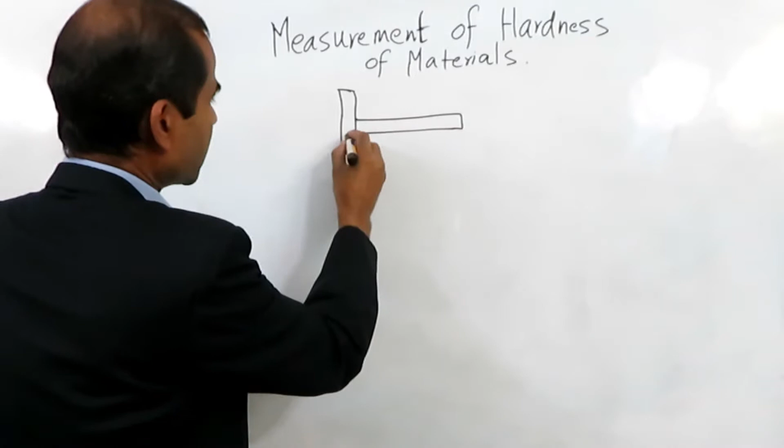So in this video I will show you a very innovative and practical method of measuring hardness using a very simple device which we have manufactured. In this method we have a stage here, and this stage is attached to a pillar here, and basically we have got a lead screw here, and this is connected to a motor. The motor will rotate the lead screw, and because of this rotation this stage can move up or down. So this is the lead screw,

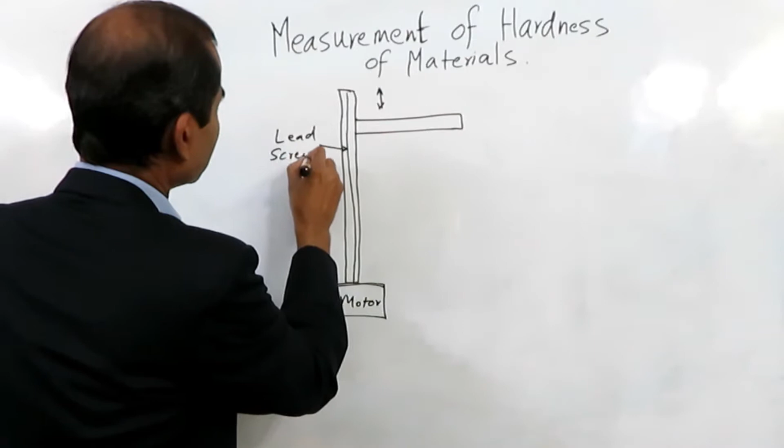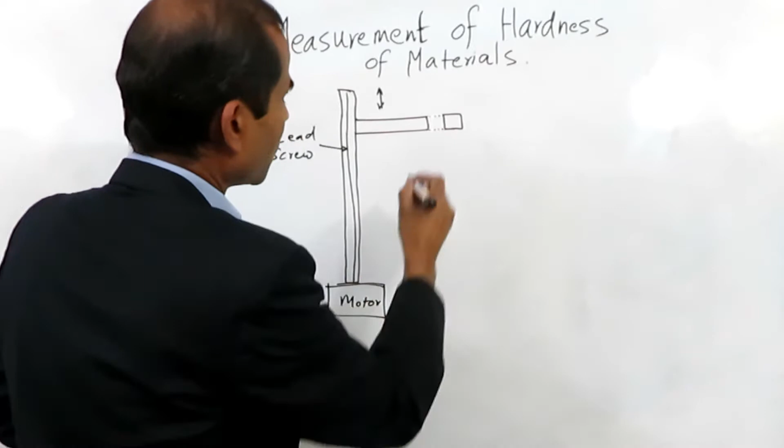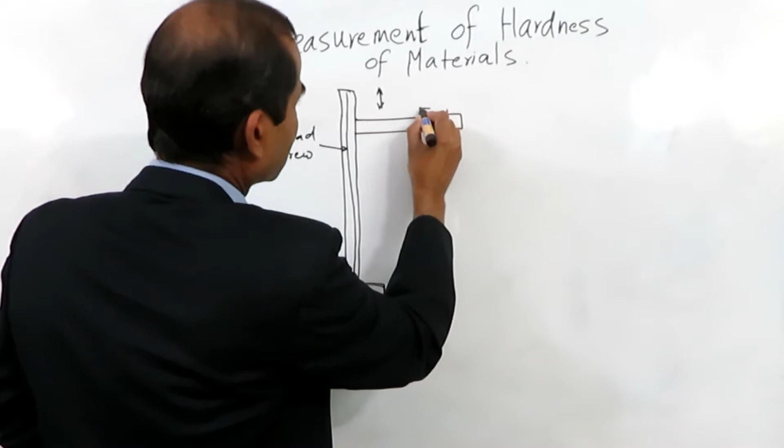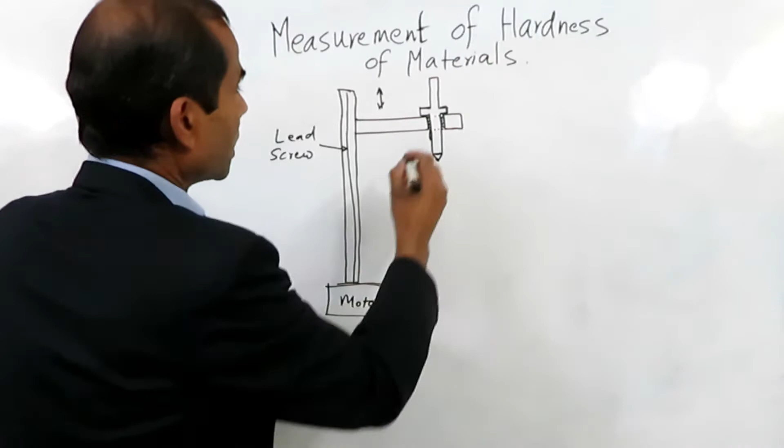and in this stage we have a hole here. And we have got a ball bearing on this hole here, and through this hole we insert a holder. This holder has a design of this kind, and at the end of this holder we have got a tip which is a diamond tip. This holder can accommodate some weights here. So for example we can attach some weights here.

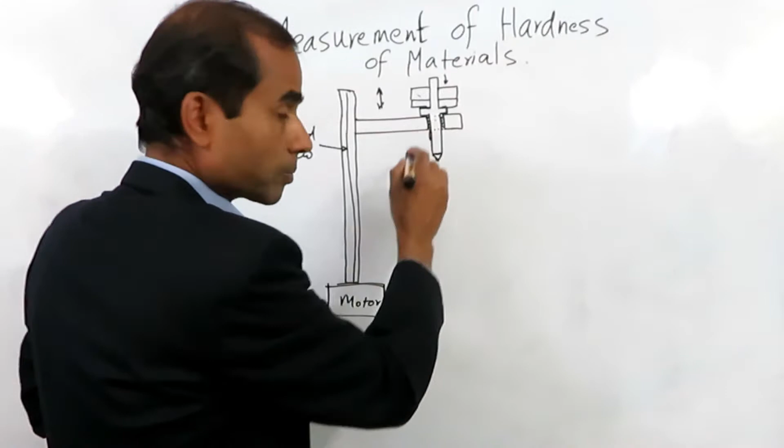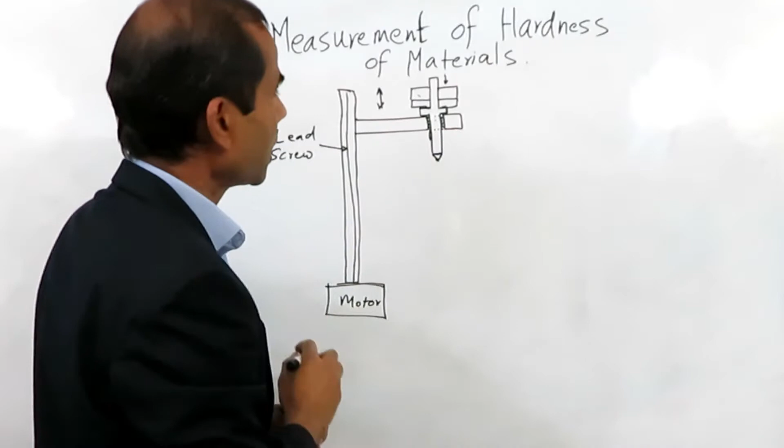So this weight can be attached to this holder, and between this holder and the stage there is a free motion because of the ball bearing. If it is hanging like this, in this position the holder will be touching the stage, but if we push from this side, if there is a force from this side, this holder can go up, and therefore there will be no contact between the stage and the holder.

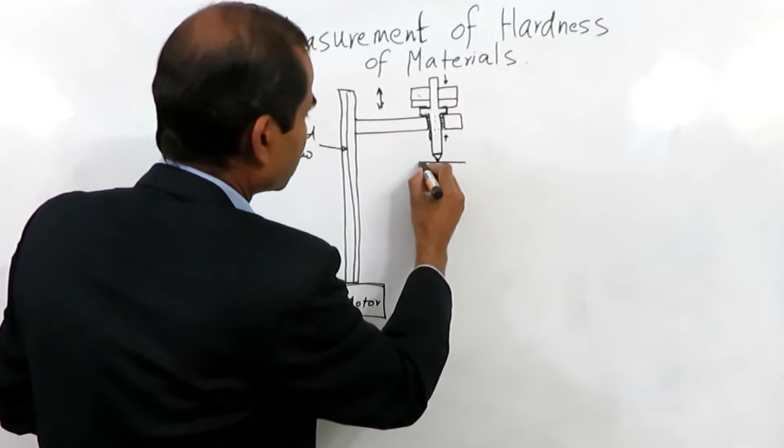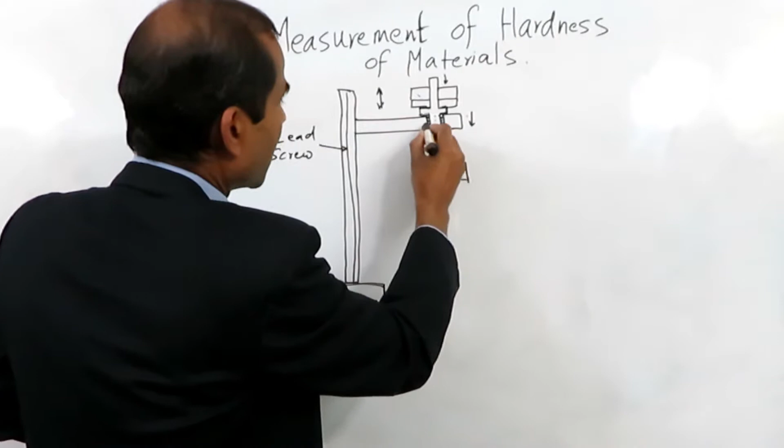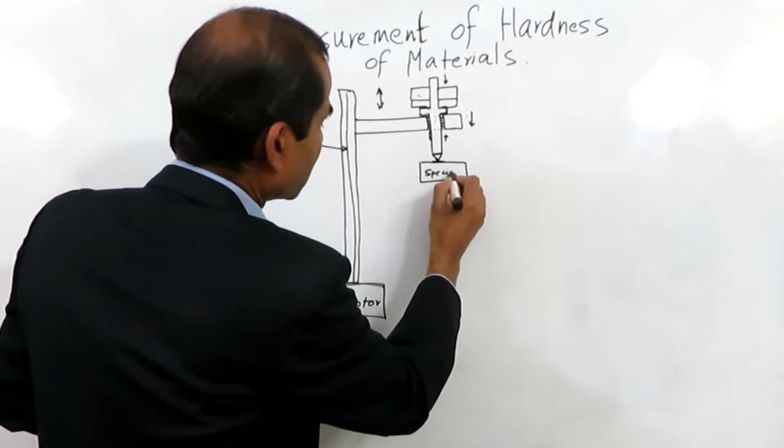So that means when we are lowering it down, and if there is a specimen here, this is the specimen of which we want to find out the hardness, and if we lower this stage down, at some point once the tip touches the specimen, the load will be taken by the specimen. As soon as the tip touches the specimen, the load will be taken by the specimen. So let's say we have got the specimen here, and this stage will move down. So let's redraw this stage. For example, let's say the stage is at this position.

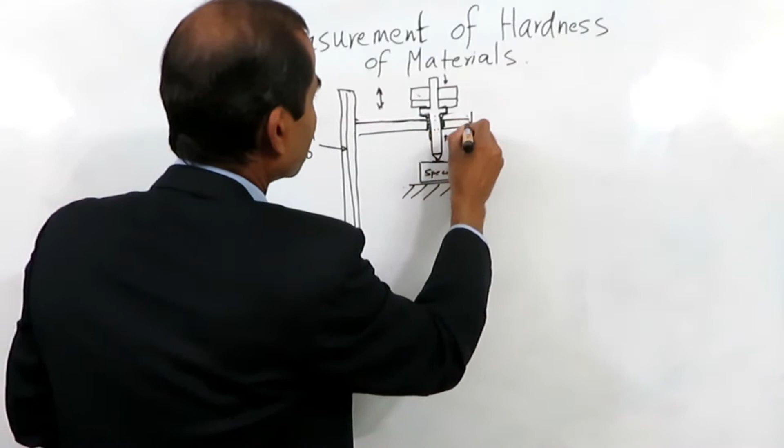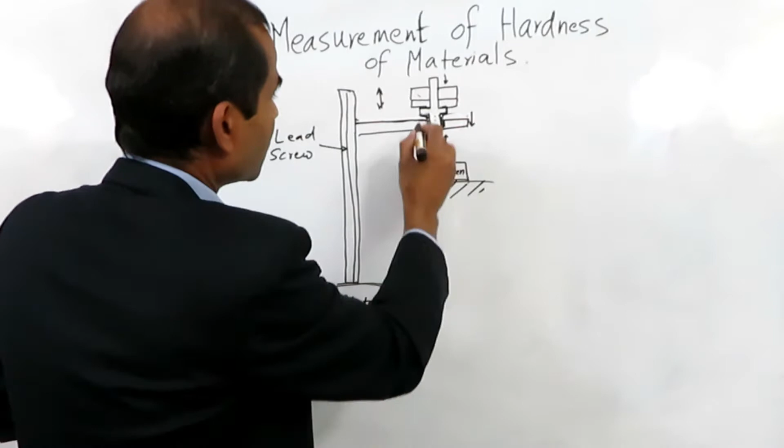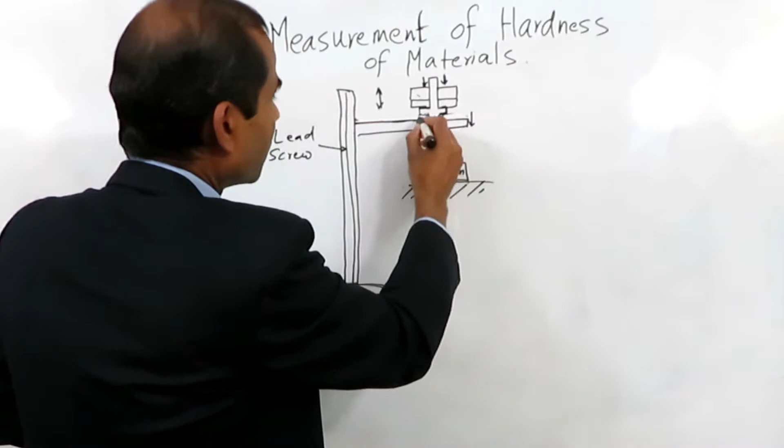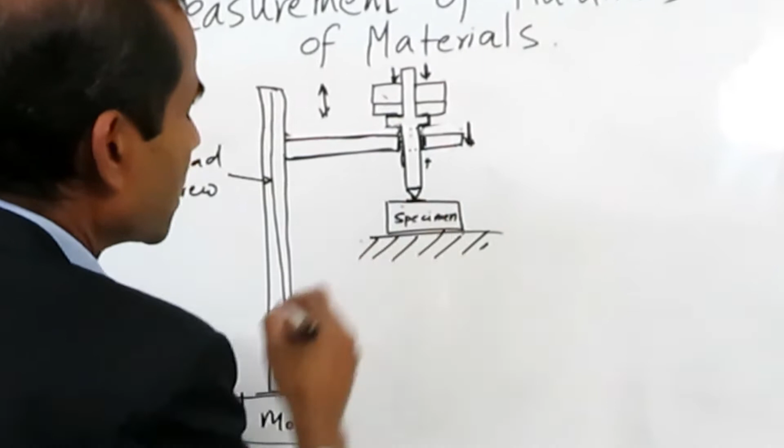So that means the stage is not taking this load because there is a ball bearing, so there is a free motion between the holder and the stage. In this position there is a gap here, and therefore the load that we are applying is being taken by the specimen entirely. So this holder is not playing any role in holding the weight. This is how we achieve this indentation on the specimen. First the stage was taking the load, and we are lowering the stage, and as soon as there is a contact between the tip and the specimen, the load will be taken entirely by the specimen, not the stage.

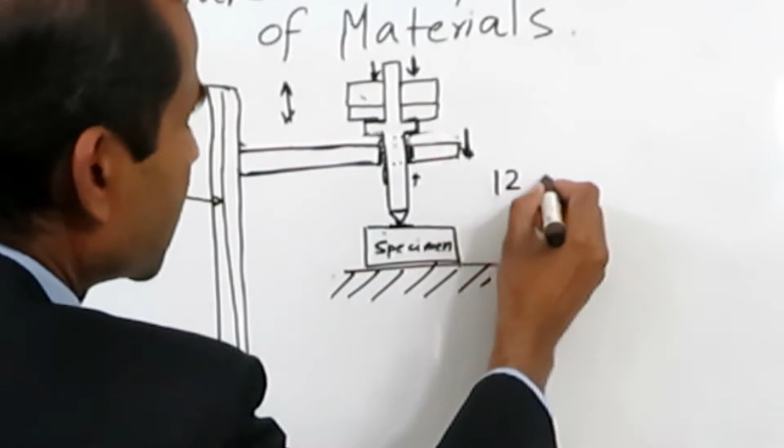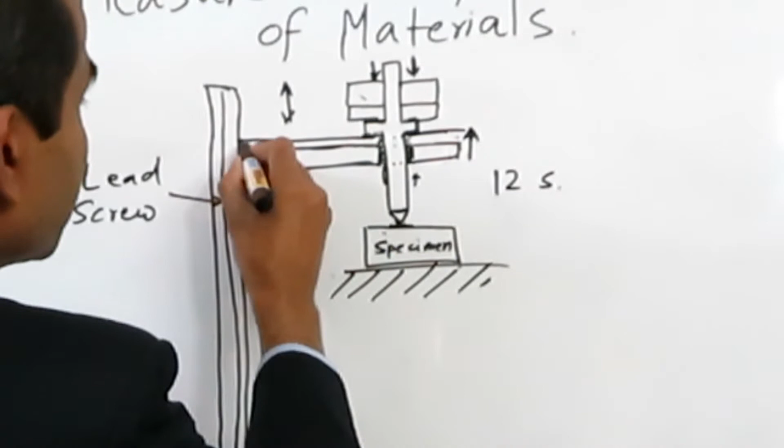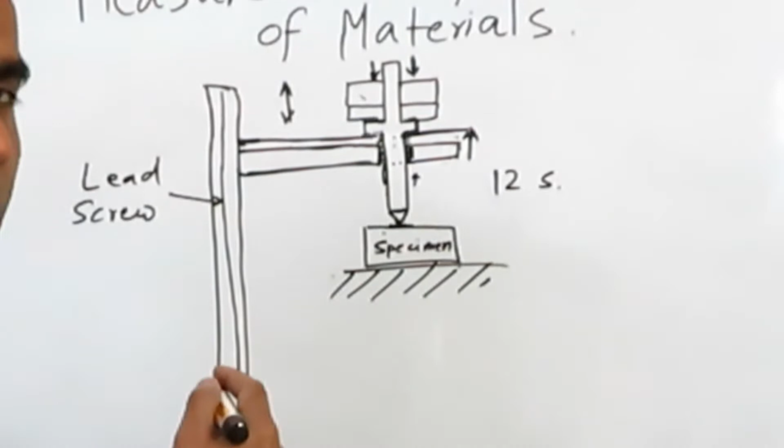And after 12 seconds of load application, we will move this stage back in the reverse direction, meaning up, and as soon as the stage comes to this level, it will pull the holder along with the weight up, and there will be no more load application on the specimen. So this is the simple device that we have designed and manufactured, and using this we can measure hardness of any material. So this specimen can be metal, polymer, or even ceramic.

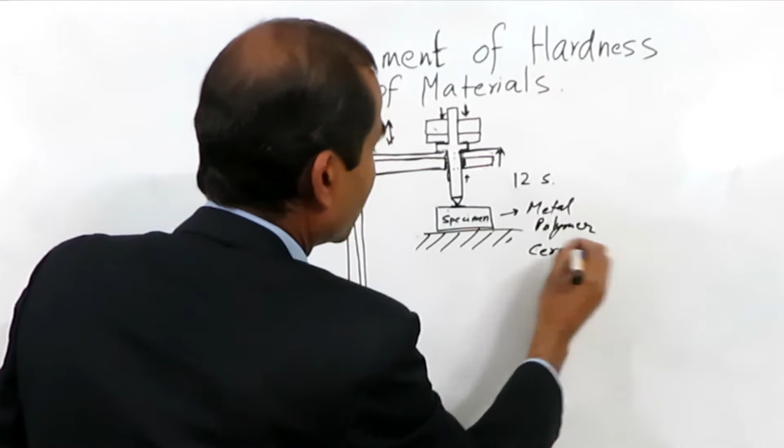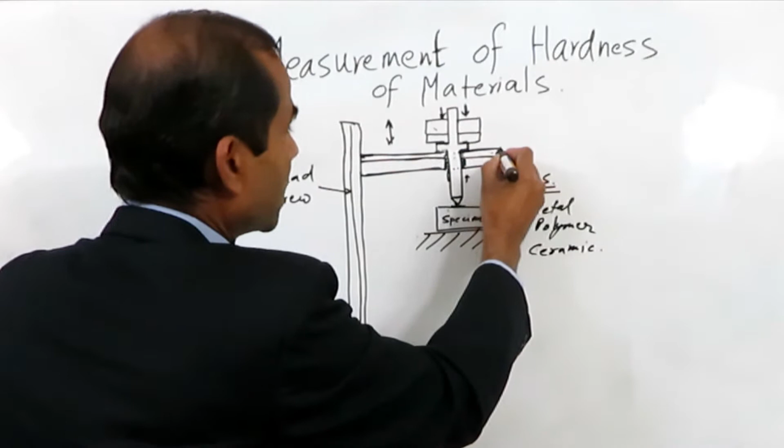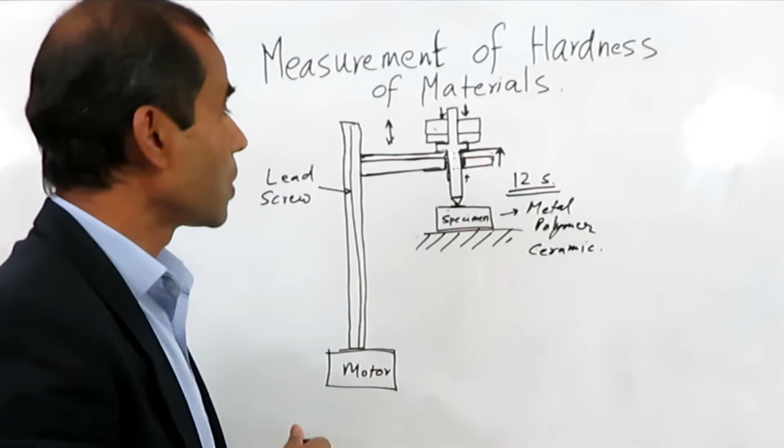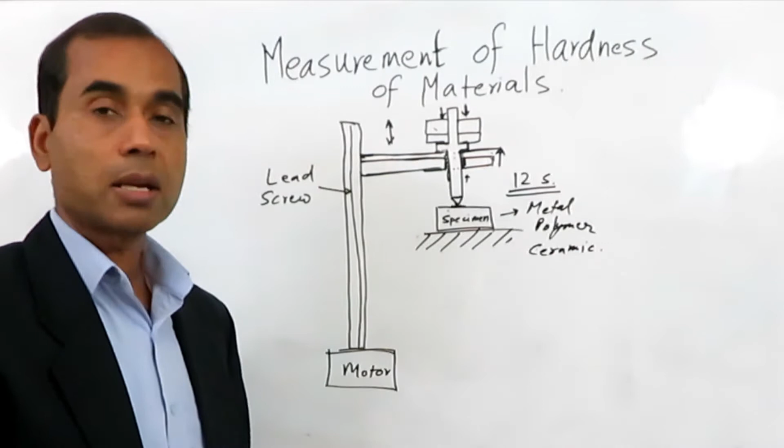So we can use any type of material and we can apply whatever load we want to apply, and we can select the dwell time, how long we want to apply the load, and we can actually control this. By controlling the movement of this stage, we can apply the load for any given time, and then we can take the whole setup up. So this is how we will conduct the hardness test, and I will show you in an actual machine how we have conducted the hardness test and measured hardness of materials.

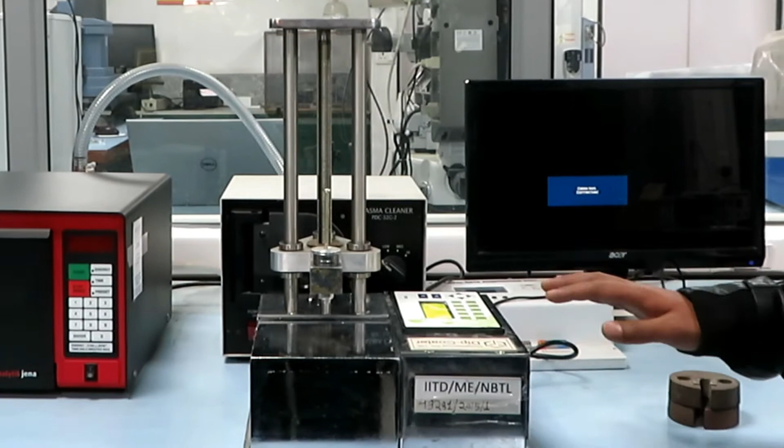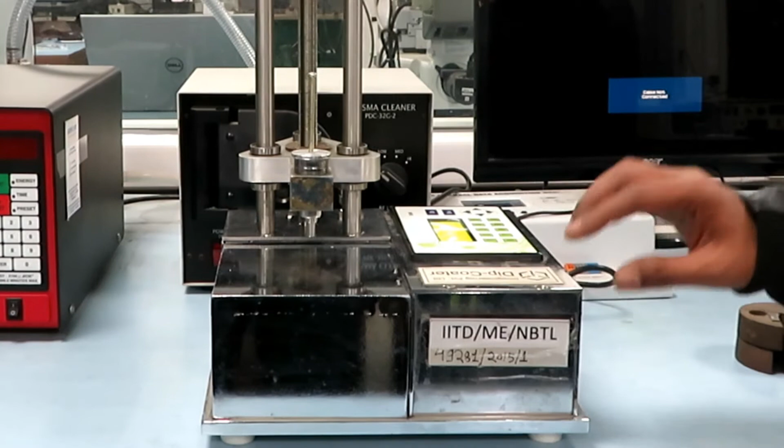This is the hardness tester, which is based on the principle of hardness as equal to the force divided by the projected area of the indentation produced on the material. This is the controller which controls the movement of the motor inside this part. The motor can move this triangular stage up and down using a lead screw. This is the indenter holder which also holds the weights used for applying force. The indenter tip holder can freely move inside the stage. Once the tip touches the sample kept at the bottom, entire weight force is applied on the specimen through the tip. As soon as the load is completely applied on the specimen through the tip, the stage movement is stopped.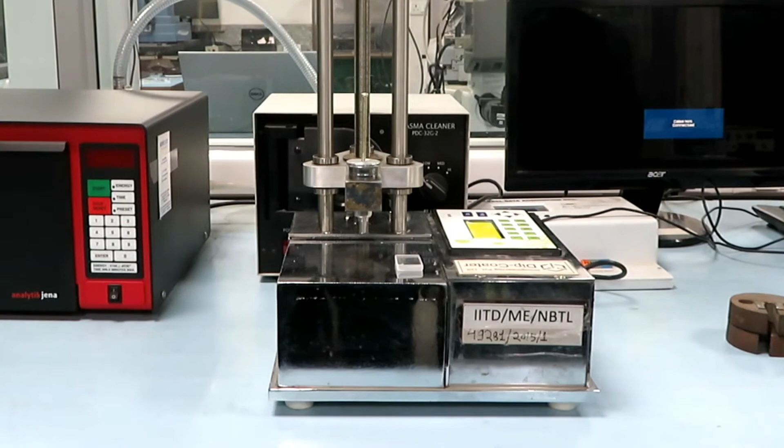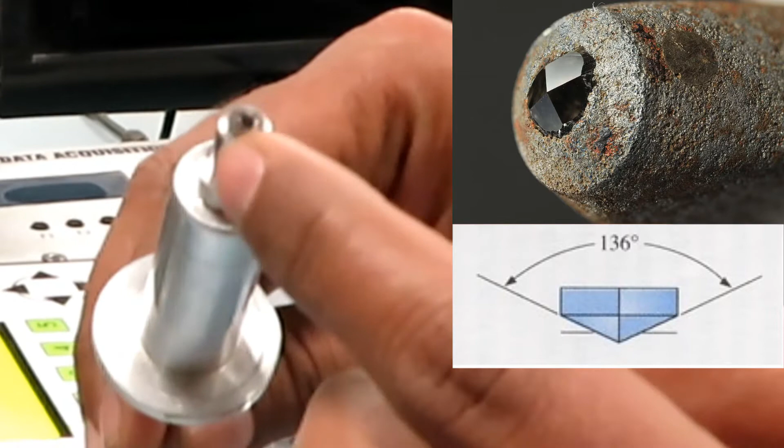The stage and the bearing inside keep the tip and weight holder straight so that the force is applied vertically downward. As you can see, one side of the holder has a square pyramid diamond indenter similar to a Vickers tip. The angle between the slant edges is 136 degrees. By keeping the holder vertical while the tip rests on the specimen, entire load is applied on the specimen through this tip.

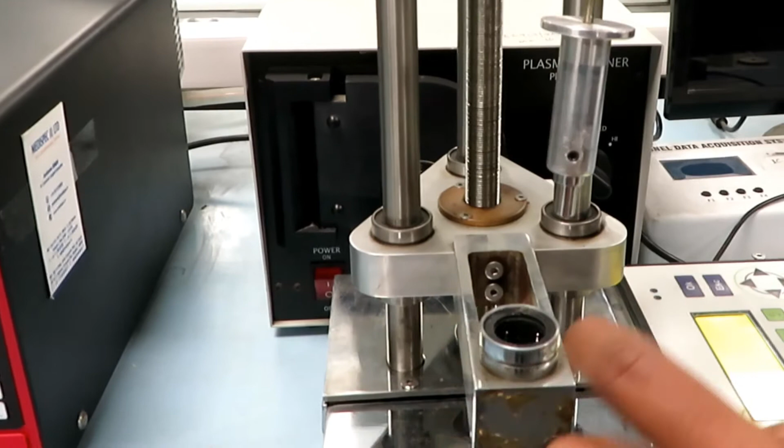The holder is inserted through this hole which has ball bearing inside. So when the holder is standing vertical on the specimen and the tip is in contact with the specimen, entire load is applied on the specimen. We keep 1 kg of load on the holder, so together with the weight of the holder, total load is 1044 gram, which translates into 10.24 Newton when the mass is multiplied by the gravitational acceleration.

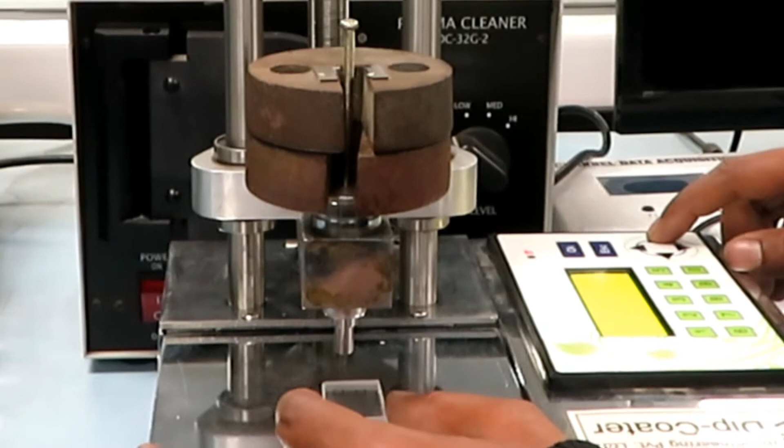With the load placed on the holder, we will lower the stage until the indenter tip is on the specimen kept at the base. As soon as the tip touches the specimen, entire weight is applied on the specimen because the stage freely moves down, leaving the holder standing vertical because of the ball bearing inside.

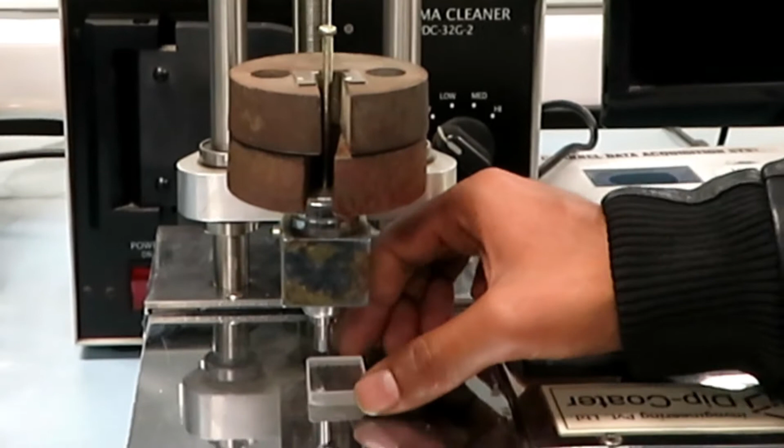The thickness of the specimen should be enough to avoid the substrate effect. In this case, we have kept the thickness of the acrylic as 6 mm. It is important to stop the stage movement as soon as the tip touches the specimen below. When the tip is on the specimen, the stage leaves the holder. Thus, the holder stands with full load on the specimen through the tip. All the load is applied to the specimen only through the square pyramidal diamond tip.

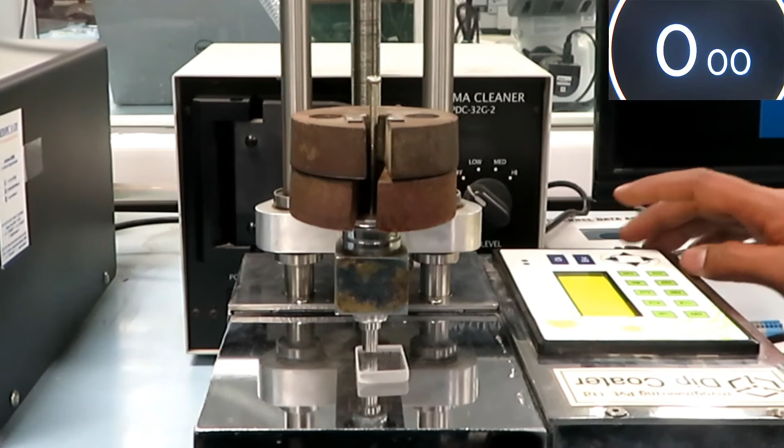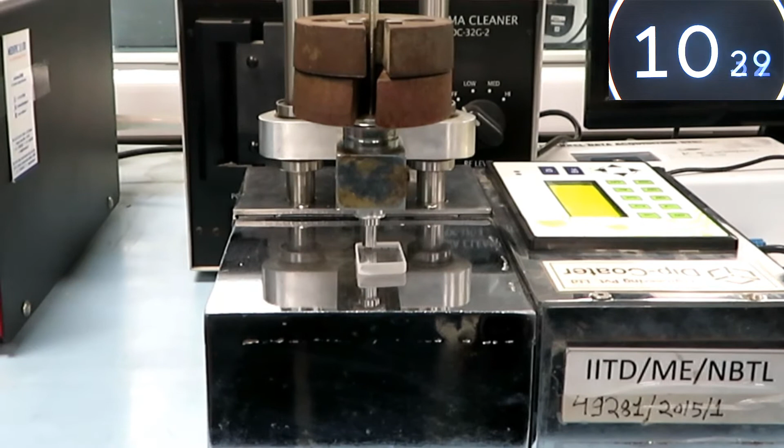Now the stage is being lowered through the motor control. As soon as the tip touches the specimen, total load is applied. We apply this load for 12 seconds and then move the tip holder up by moving the stage up. We follow the ASTM standard for dwell time, which says that the load should be applied for 10 to 15 seconds.

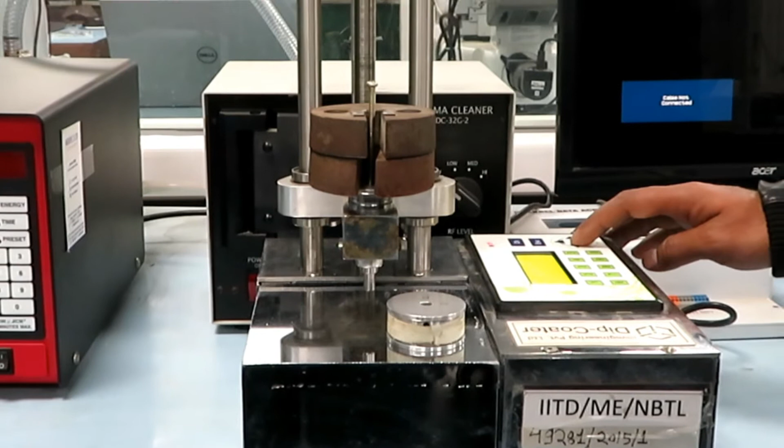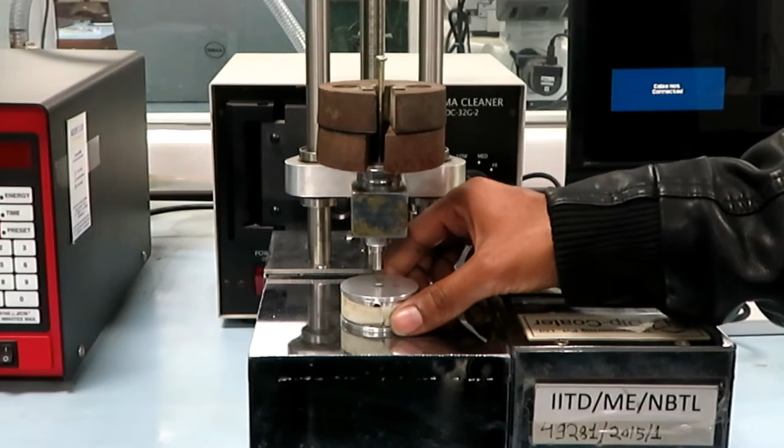Now we will conduct the same test on aluminum surface. So we will place the aluminum surface underneath the tip. You should keep the indentation away from the edge to avoid edge effect. Now again we will apply the load for 12 seconds.

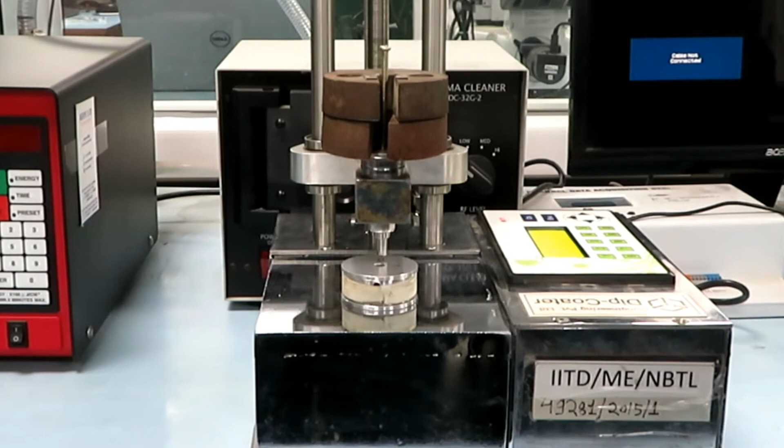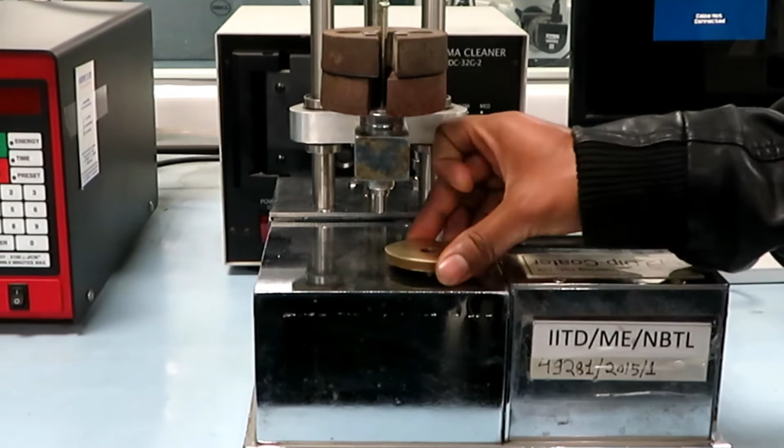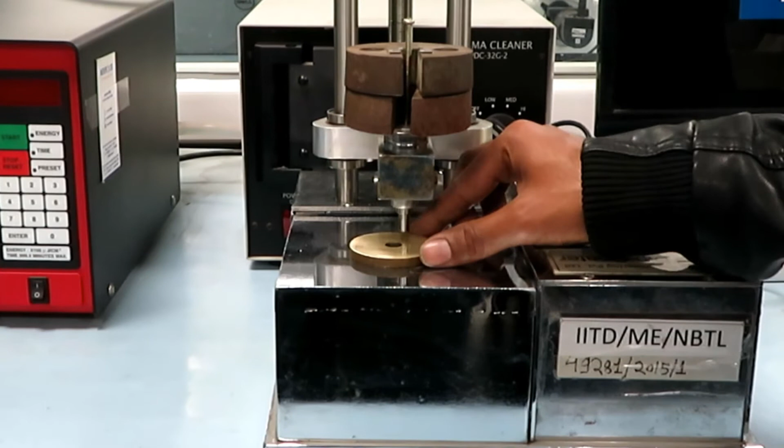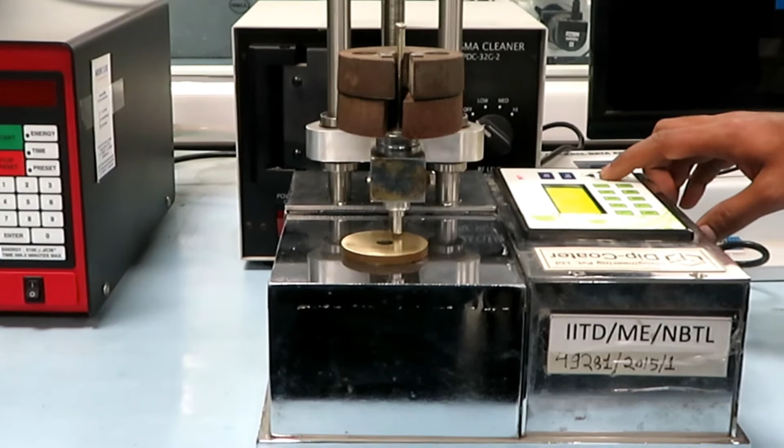Next, we will conduct the same test on brass. So as soon as the tip touches the material, we stop the motor, and after 12 seconds we will move the stage up by again switching on the motor in the reverse direction.

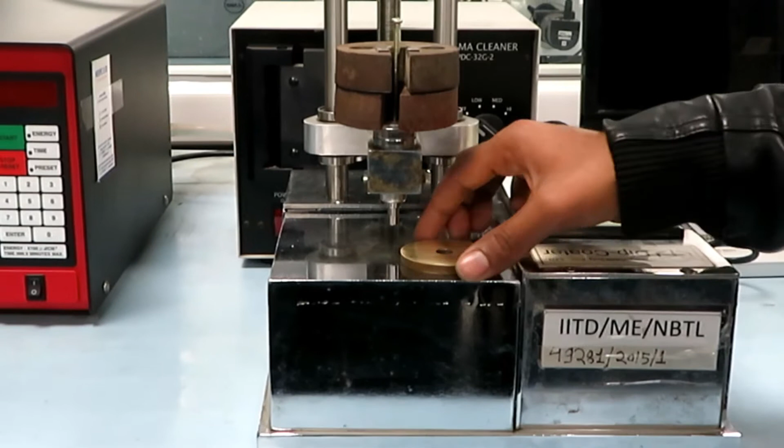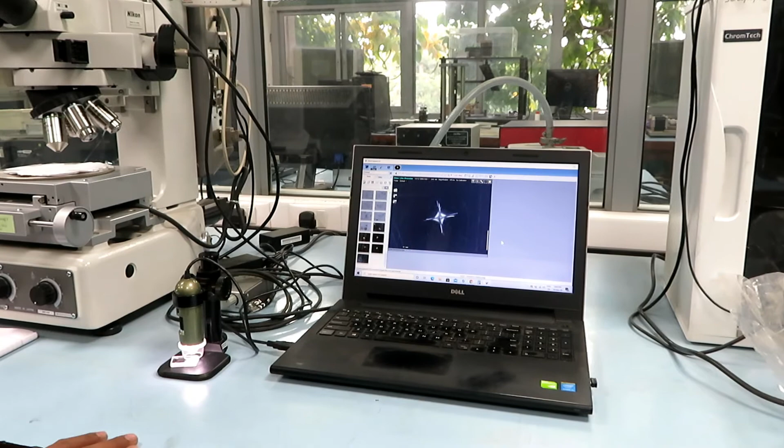So now we will image those indentation marks. It is very important to image the indentation marks with a correct method. In this case we are using a microscope. This is called Dino-Lite. It is a portable microscope and it has connected software. Using this software we can actually measure the two diagonals of the indentation mark.

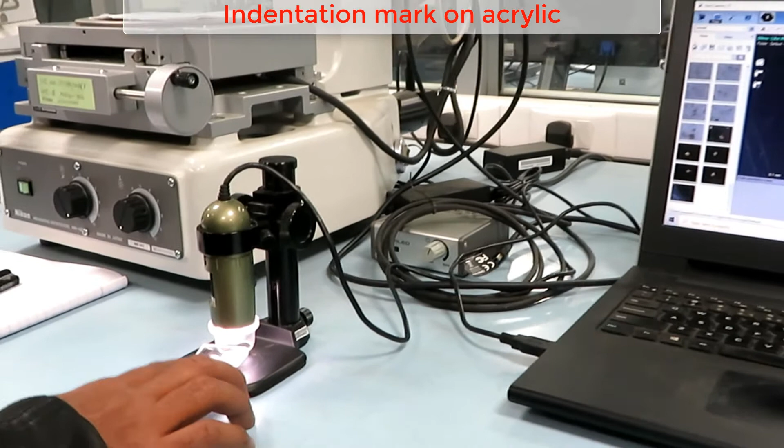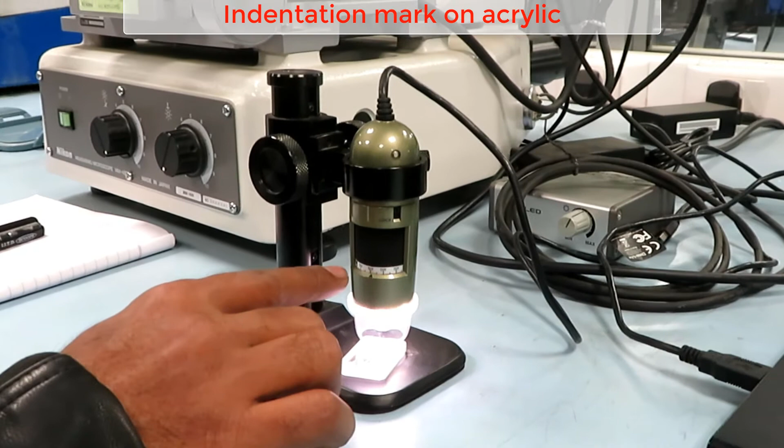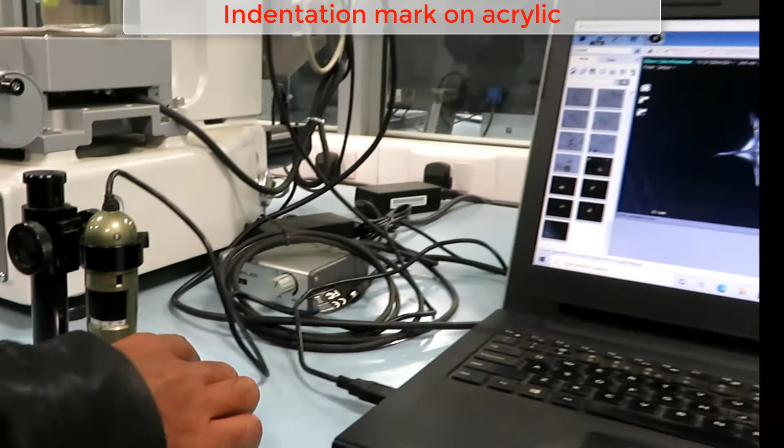Since we have used a square pyramid shaped indenter, the mark that we will get will be two diagonals at 90 degrees to each other, and the shape of the indentation mark will be square. So here is the magnification. This works in the range of 460 magnification. By fixing this magnification and properly calibrating the software, we can directly measure the dimension of these diagonals.

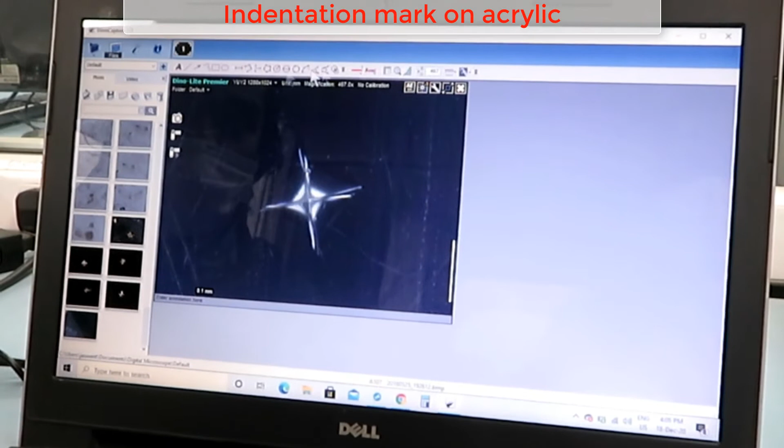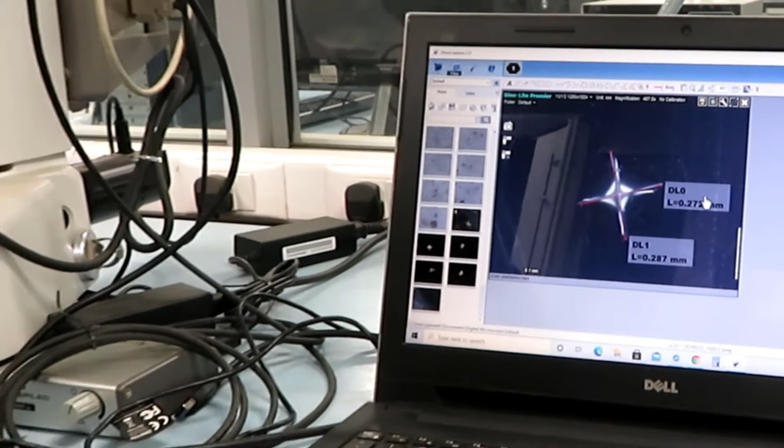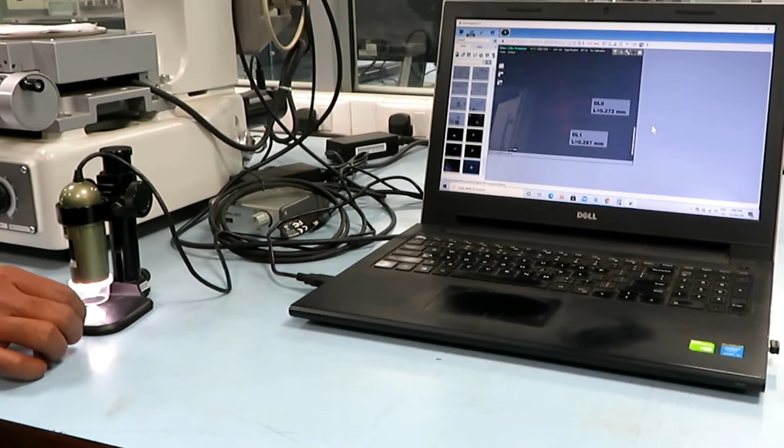So this is acrylic specimen, and here you can see one of the diagonal is 0.272 millimeter and the other is 0.287 millimeter. We will take an average of these two measurements and that will be our D. Using this software you can also image, so you can take the image for your later use. Now this is the aluminum surface.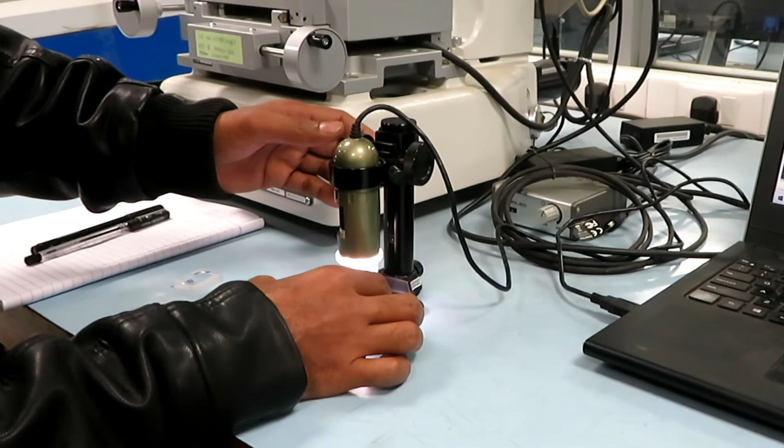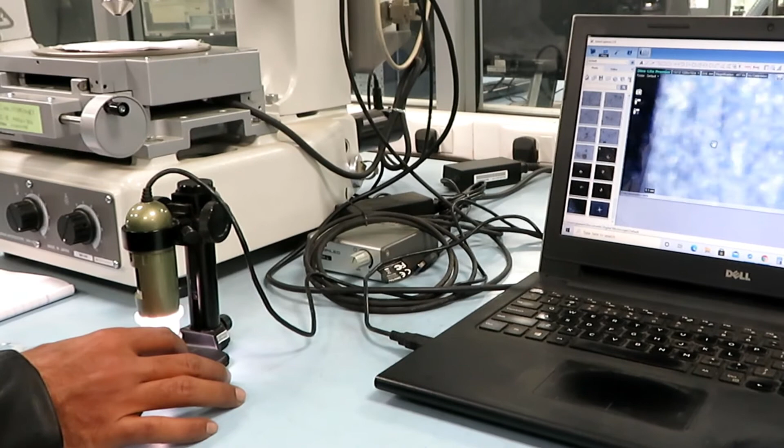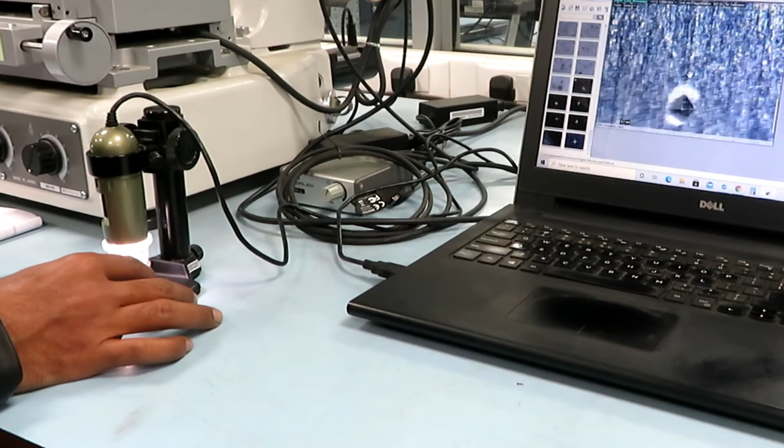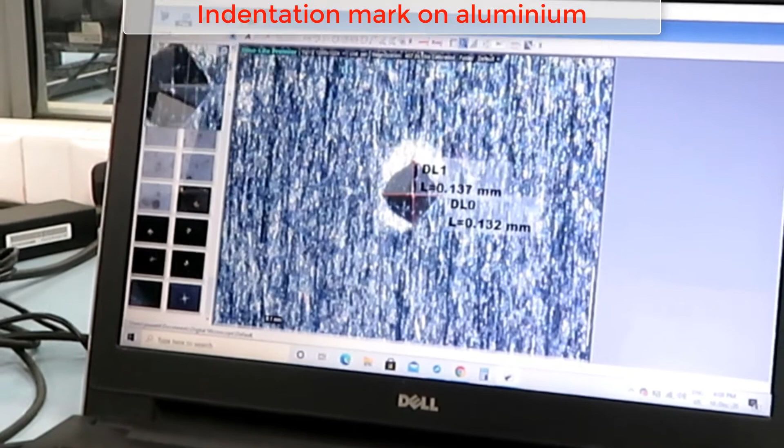If the indentation mark is very small, then you may need another type of microscope which has got higher magnification. So this is the indentation mark on aluminum surface. At the same magnification, we can see that the aluminum surface gives a smaller indentation mark compared to acrylic, which indicates that aluminum is harder than acrylic surface. Now using this software, we can measure the two diagonals. One of the diagonal is 0.132 millimeter and another one is 0.137 millimeter.

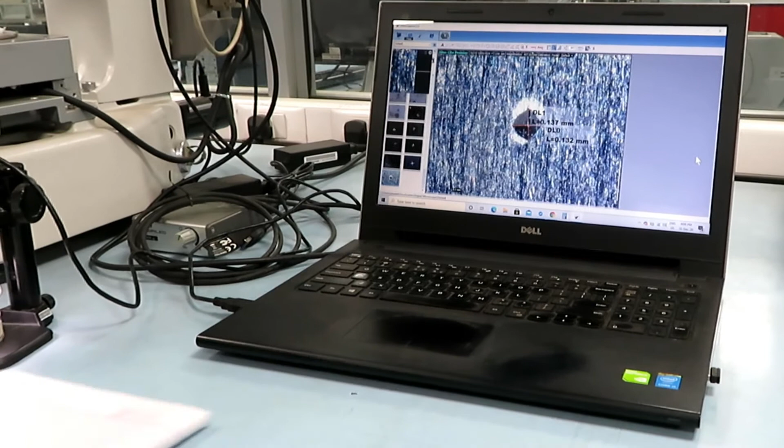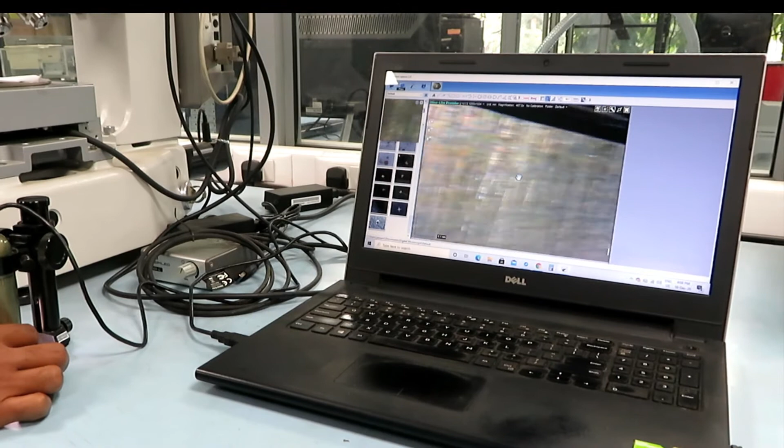Lastly, we will measure the indentation dimensions on brass specimen. Before hardness test, it is very important to polish the surface very carefully. Otherwise, the indentation mark may get lost in the scratches that surfaces have. So here we can see the indentation mark on brass surface. One of the diagonal is 0.14 millimeter and another is 0.133 millimeter. We will take average of these measurements and we will call it D for our hardness calculation.

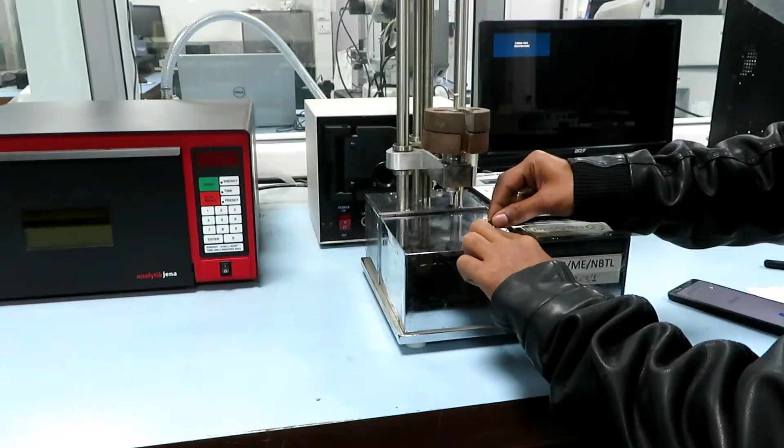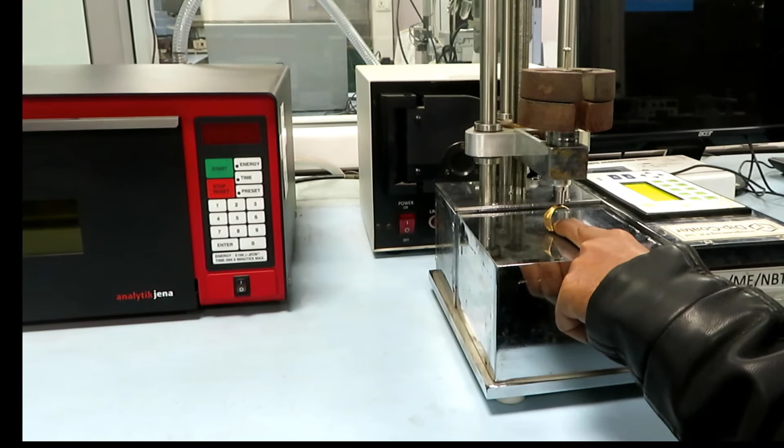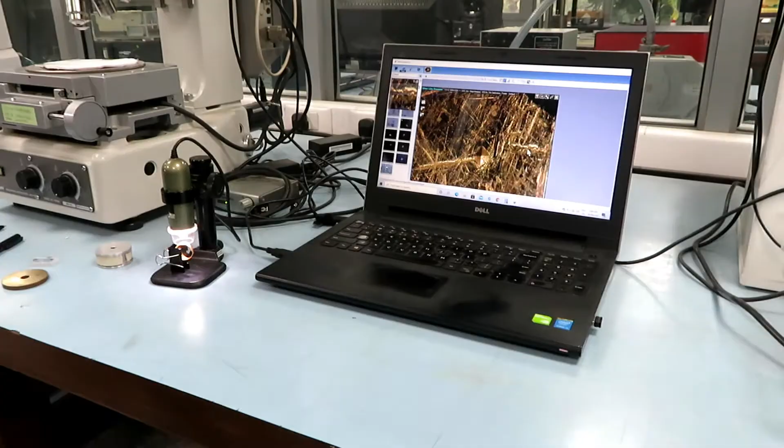Lastly, we will show you a test on gold. Gold is another metal and here we are using a ring and we will conduct the hardness test on this ring. This ring is 24 karat gold. By using the same procedure, we can find out the hardness of this gold material and we can compare it with our other materials like acrylic, aluminum and brass. Now you can see the indentation mark on this gold surface. This gold surface has many scratches, but still we can see the indentation mark.

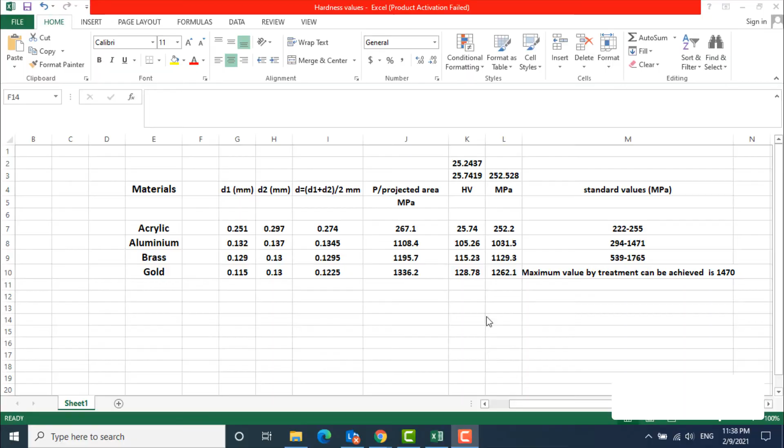Finally, let us analyze the data. These are the materials we have just tested: acrylic, aluminum, brass and gold. And these are the diagonals D1 and D2 which we have measured in millimeter. And then we take the average of D1 and D2 which is D. So these are in millimeter. These are the averages of the two diagonals.

Now if we use the equation of force divided by the projected area, then we can get these megapascal. For example, acrylic has got hardness of 267.1 megapascal and it uses the equation that I have developed in the previous video. And these are the values. This value is for the Vickers hardness.

If we use the Vickers hardness equation, HV is 25.7 and this one is using the Vickers hardness concept and we convert it into pressure. So this pressure and these pressures are quite similar. This is also in megapascal, but this one is using the equation of hardness which is force divided by the projected area. Similarly, for aluminum we can get this value as the hardness, and for brass and for gold. So gold is the hardest material among these materials we have tested.